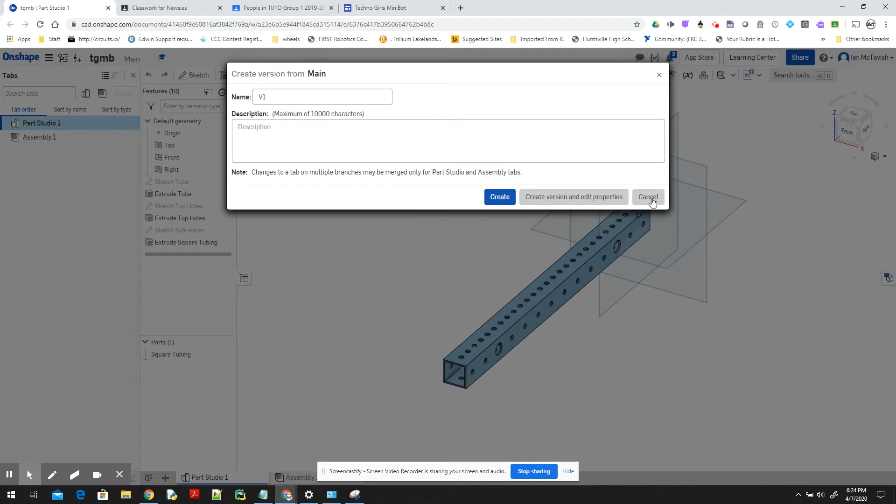So we are working on gussets, and basically the goal with the gussets is that we are going to be taking square tubing and connecting it. So we've got our piece of square tubing right here. Sorry, I tried to do that earlier and that popped up. So here's our square tubing. Later on, we're going to add a gusset to it so that we can attach another piece of square tubing. So that's what we're going to design right now.

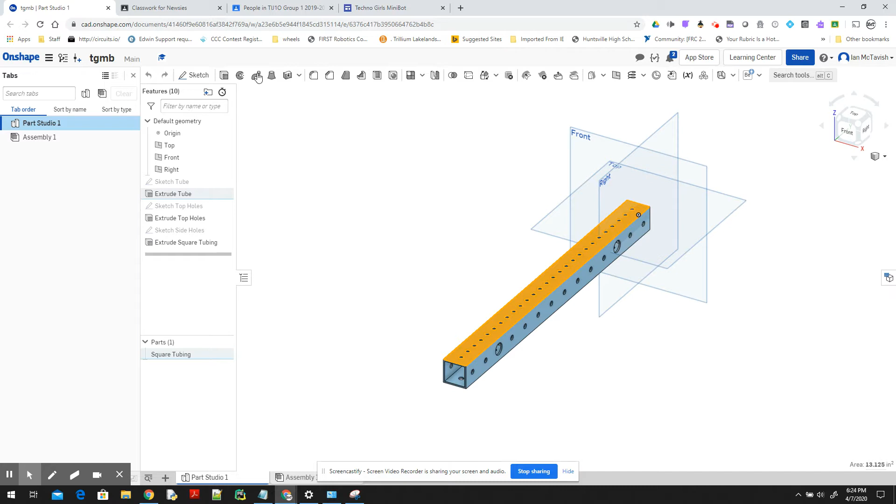And what we're going to do is that the square tubing is going to go on the top. So we're going to select the top and we are going to click the sketch. So this allows us to sketch right on the top of the square tubing, just like we've done before. So I'm in the sketch. I'm going to click N to normalize my view. And now that we're normalized, we're going to draw a rectangle. And so over here is the rectangle tool.

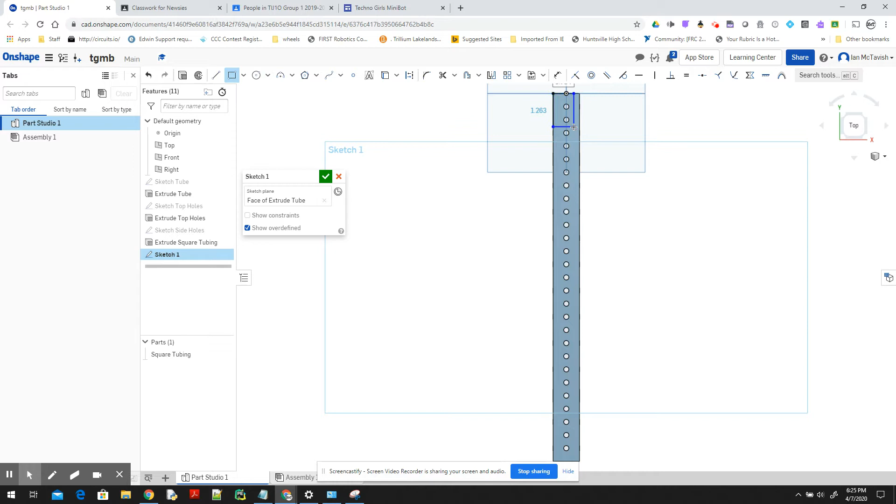And we're going to hold our mouse over the corner and we're going to click once, and that starts our rectangle. And I always like to not get constrained. So I'm just going to click over here where it's not orange, and that allows me to type in the length, and our square tubing is 1 inch. And this particular piece is going to be 1.25 inches. So that gives us a rectangle that's going to cover at least 2 holes, which is going to be useful.

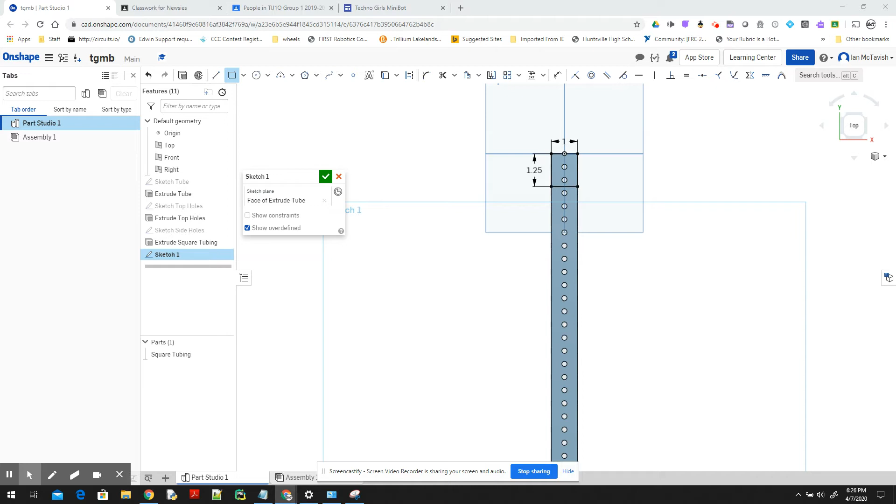Now, if I zoom in, I'm just going to turn off the rectangle tool. If I zoom in, there's my holes. What I can do is right-click and use. And this is a really handy thing that I can use elements that are on a different sketch, but that line up with this. And just like that, I've made the 2 holes for my gusset. Everything is going to fit nicely, which is great.

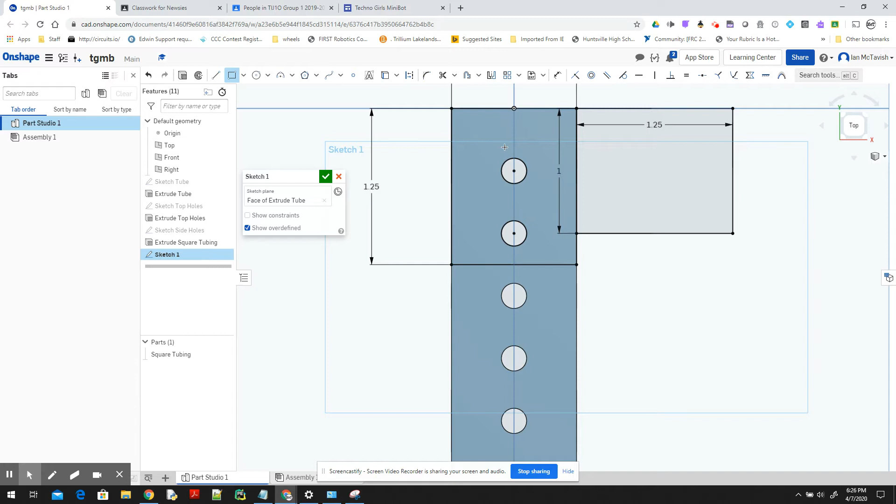So I'm going to add a second rectangle. So this rectangle, I'm starting at this corner point. So I'm going to click once, move my mouse, and click a second time. And this time I'm going to do 1.25 for that length, and then 1 inch for this length. So this is going to give me an L bracket, and part of the L will cover this side, part of the L will cover the square tubing that's going to go right over there.

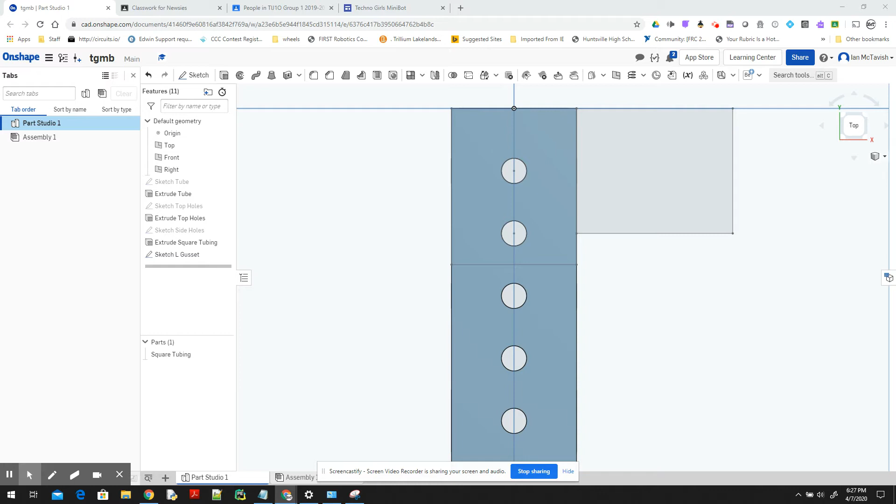So that's really handy, and I'm going to change my sketch name from sketch 1. Whoops, I accidentally closed it, so I'm just going to right click and rename and call that L gusset. So that is my piece of square tubing. And what I'm going to do now is I am going to extrude that L gusset. So with the extrude button, if I select sketch L gusset and click extrude, that should extrude my square tubing.

The default 1 inch is a little bit big for what I'm doing, so I'm going to set that to 0.25, and I'm going to select new. And that's really important because I don't want it as part of my square tubing. I want it as a separate part. So it's new. I'm going to change the name. Now, the reason I picked 0.25 is I happen to have some 1/4 inch Lexan that we're going to use to actually manufacture this. And there's different ways you can do it, but you want to think about what materials you have to build things with.

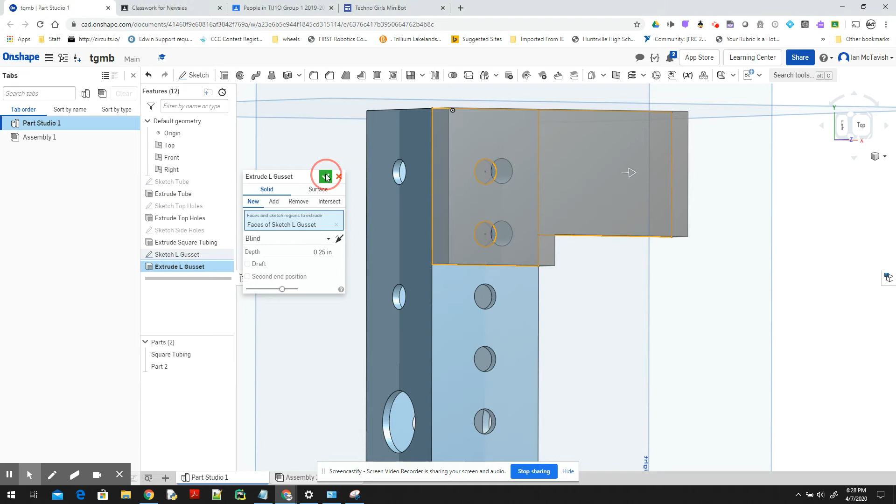So there's my part. You can see there's 2 holes. I do want to explain, I will be adding holes in a later tutorial here, but I'm purposely holding off because I want to explain a few things. Now, that's the part, and I'm just going to right click and I'm going to change the properties for this particular part. As I've mentioned, we always name things, so L gusset is a nice, easy to remember name. And with our part numbers, I'm going to use my same part numbering convention.

So TG, I always have 2 to 4 characters that represent either my initials if I'm creating a thing or if it's part of a group. So Techno Girls is the group, so TG. MB, because that represents the particular project. So our competition robots are always 4152 for the team, and then this year is 20 because it's 2020, to represent that it's the robot for the 2020 season.

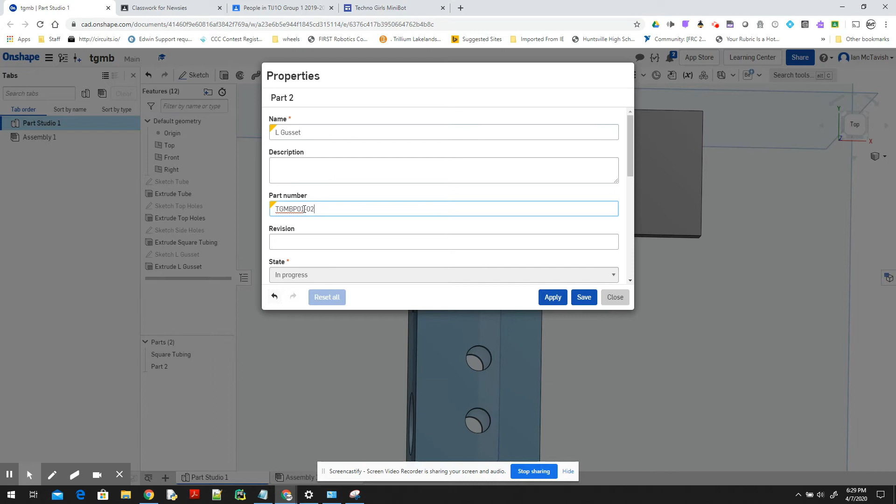The next thing is P because it's a part, and 01 because it's part of the first assembly that we're going to create, and then 02 because this is the second part that I've created. And I do find I just keep little notes for myself as I'm creating things to keep track of which part I'm at. I'm going to right click and assign the material now.

And as I mentioned, I've got some Lexan. Well, Lexan is actually the brand name, and this is actually called polycarbonate. If I just search for POLY, there is polycarbonate. And I love working with polycarbonate because it's very strong. Bulletproof glass is made out of it, but it's also really easy to work with. And so it's a material that I like making things out of.

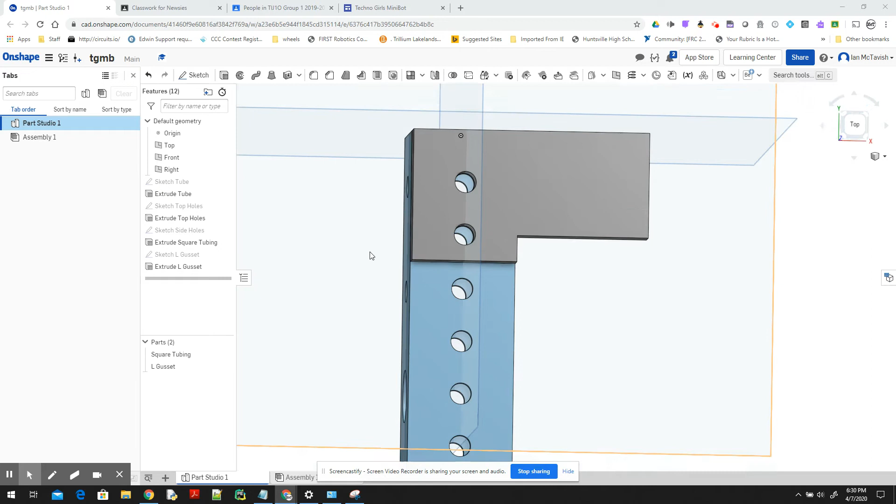So that's my L gusset. And as I mentioned, it's not totally finished. We're going to finish it in another tutorial, but I wanted to make sure that we got the basic shape and we got the holes so that we can attach the first piece of square tubing to it. Now, I'm going to create a second piece, and this is going to be a T bracket. So basically, I'm going to have my square tubing and a piece of square tubing here, and then I'm going to have another piece of square tubing here.

So same thing, I'm going to click the top of the tubing and create a sketch, and the rectangle, and I better click N so I can normalize my view. And I'm just going to click on the side here and drag down and click so it's 1 inch. And the T tubing is going to be a little bit longer. It's going to be 2.5 inches. And that's popped up and gone up here, which is a bit higher than I want. So I'm going to set the dimension for this.

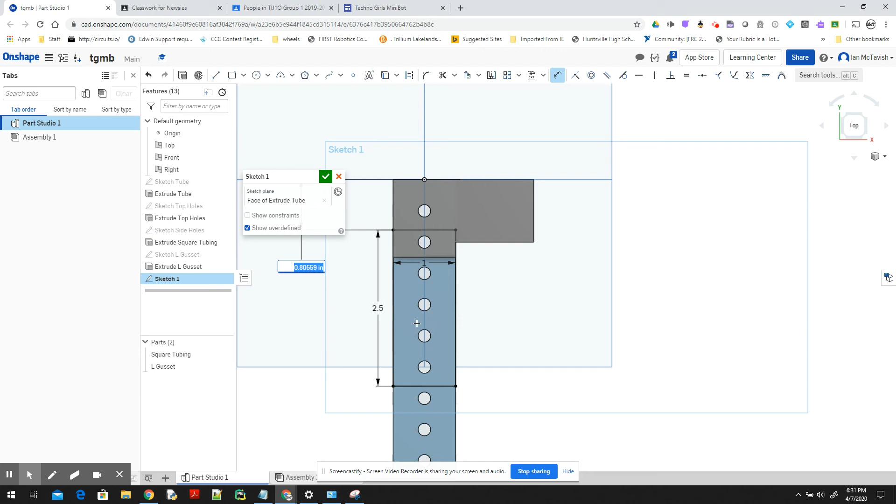And what I'm going to do is this. So what I've done is click the dimension tool, click the top of my T and the top of my L bracket. So this is 1.25 inches. So that's going to be basically 2.25 inches. So I'm just going to type 2.25. And this has positioned it quite nicely, so it's midway between two circles, and I've got 5 circles on my T. So that's my first part.

My second part is going to be creating the other part of the T. So I'm just going to click here and click and drag, and 1.25 for that length, and 1 for the height of this. And for this particular part, I'm going to click the dimension tool, click the top of that and the top of that, and this is going to be 0.75 inches down. And I have the advantage, I sat down and did the math here, but I know that these are all 0.5 inches, and this allows me to line up the circles when I put in the square tubing.

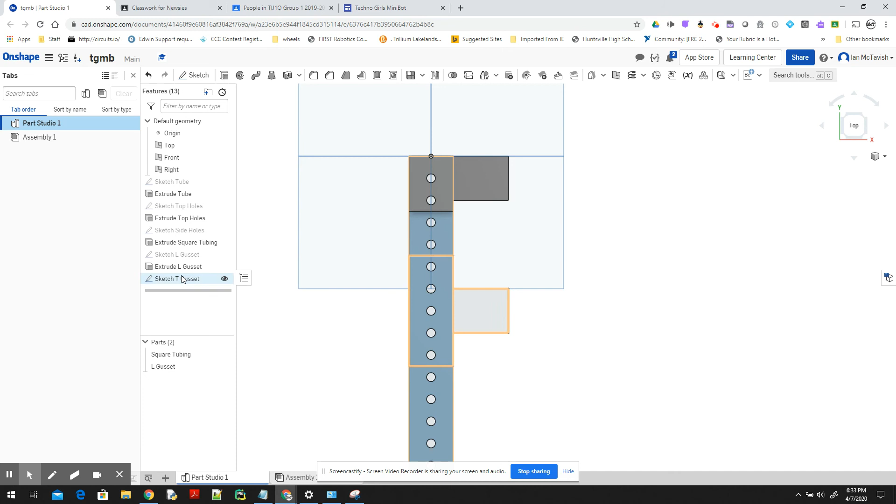So I'm going to save my sketch, name it T Gusset, green check mark. I think Gusset might have 2 S's, so I will fix that later on. And I just realized I need to go back in there because I didn't use the holes. So I just need to quickly go in here, right click each hole. So I went into the sketch, and there's all my holes. Green check mark.

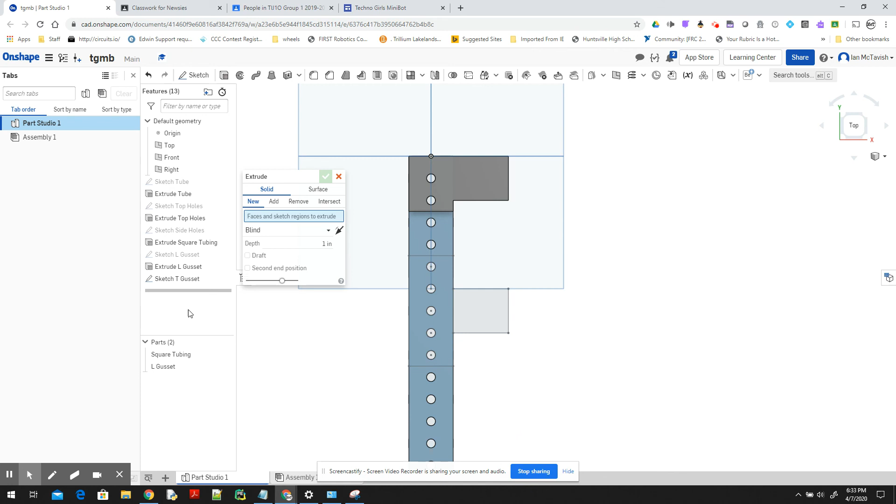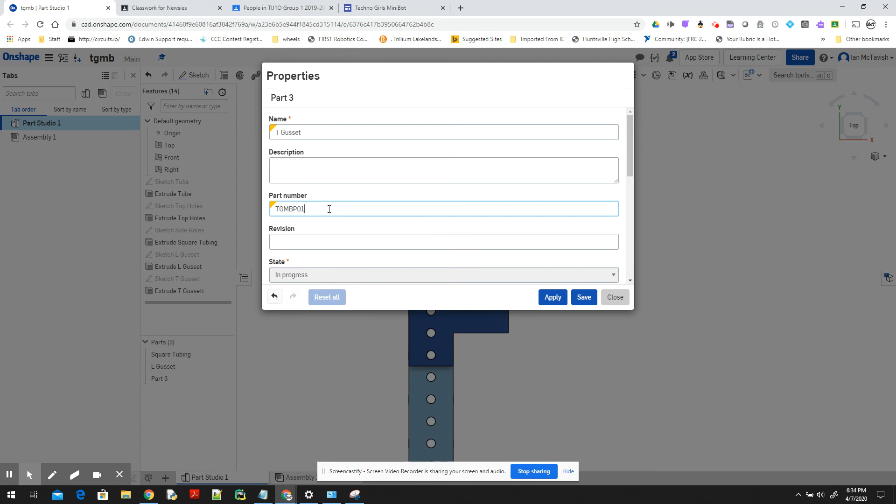Extrude, select the sketch that I'm extruding. Again, it's 0.25 inches, and it's going to be a new part. And it's extrude T Gusset, so I can find this again. And so I'll need to go through and fix that. And again, I need to set my properties. Techno Girls, MiniBot part 01, and then this is going to be 03.

And I can right click and assign my material. And again, I'm going to use polycarbonate for this particular piece. And just so that you know, you can also change the color as well. I'm not going to worry about that right at this point.